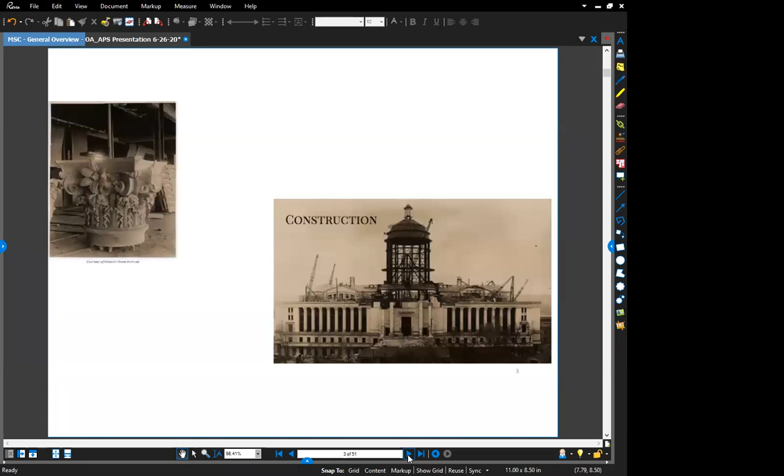Bill? Okay, Mike, thank you very much, and good morning to everyone. Get ready for some pictures that you probably will never be able to see again because of where they were taken. So I'm going to start with a picture of the original construction underway, the last time there was scaffolding on the dome. Also on the right of the picture is the original Ceres statue looking back down towards the north. Keep in mind as much as you can remember what Mike brought to you, because we're going to cover all of that pictorially in the next few minutes.

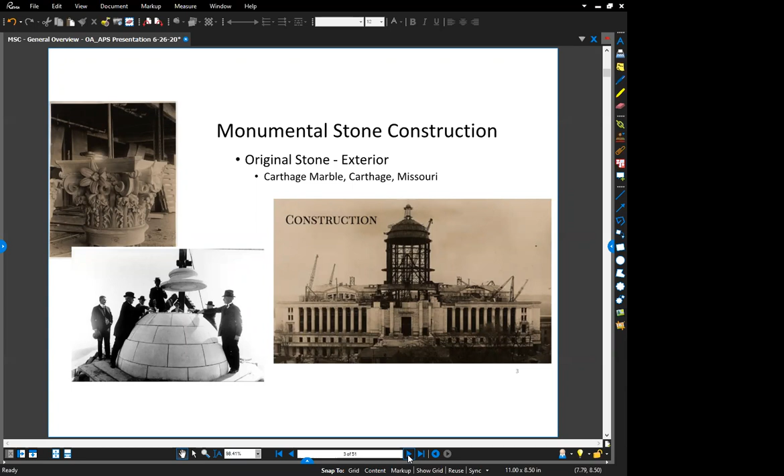As Mike said, the original stone for the Capitol came from Carthage, Missouri. That quarry is no longer operating. The hole in the ground is there, but getting that original stone was not possible. However, the stone that was chosen, and the other two in the final selection from Oklahoma and Batesville, Arkansas, even though they are in different states, are all in the same geologic formation.

One thing to keep in mind when we use the word marble is that we think of marble as something on our countertops at home, very hard, very dense. The Carthage marble is actually a limestone, and limestone is a porous stone, and therein lie some of the issues with using limestone on any building: because it is porous, it does absorb water. Natural cracks in the stone, from the way it was formed millions of years ago, can cause problems, and all those problems manifested themselves in the Missouri State Capitol and were drivers of the renovation. Mike mentioned some severe deterioration and problems.

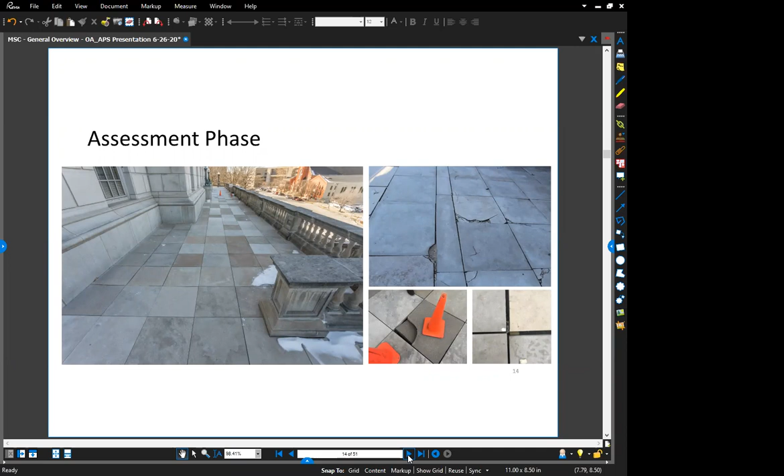Drones were used for assessment to look at places that were inaccessible without scaffolding. There's a lot of drone usage, flights, pictures taken. Here's some pictures of the plaza terrace pavers as they existed before. You'll see a number of different colors. That is because there is a variety of other stones in the Capitol. It was built not only with the Carthage marble, but there is Indiana limestone, Alabama limestone. There's kind of a mix of stones on our Missouri State Capitol, or I would say there is still some remaining, and I'll cover that later. There's pictures of some of the deteriorated pavers.

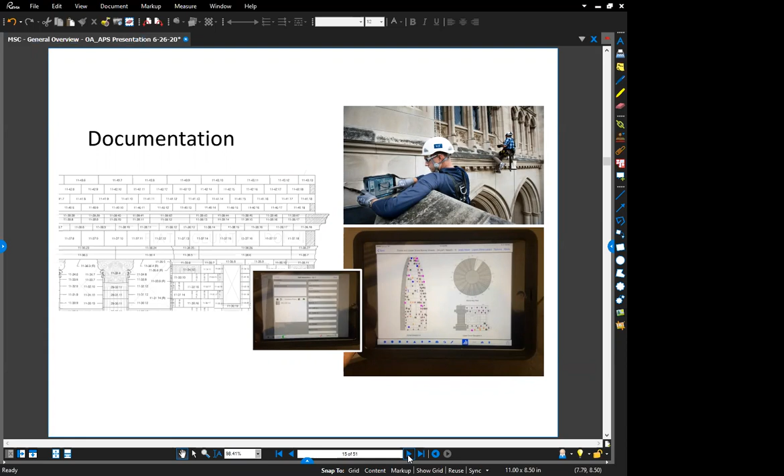After the assessment, then it came time to document it. So there you see one of the workers from the stone consultant taking pictures of some of the damage. You see just one picture; there's hundreds of pages marking every stone on the Capitol and its condition, which was later used to determine the scope of the work for the project.

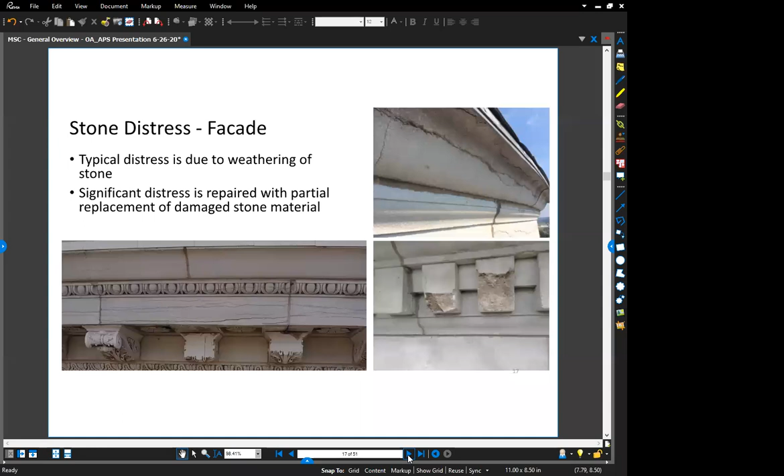And the distress that Mike mentioned, due to the weathering of the stone, there's some classic examples of the horizontal planes of the rock beginning to separate, the stone beginning to separate, which it does naturally. You see a picture of some stone features there that literally have fallen off, and there's no place to go but down with that. And so that falls down on the plaza, on the terrace.

So then, now that everything's been documented, what do you do? Mike mentioned the goal was not to put a new look on the Capitol, but to restore it in a manner that it was the same as the original Capitol, to maintain its historic value. So the first priority, of course, was life safety. Where were there portions of the Capitol that were literally falling down that could become a hazard to people below, and letting water into the building and causing further damage?

Priority number 2 was serviceability, and that was basically repairing stone that could continue to deteriorate in the coming years, since the Capitol is going to be around a long time. And the final priority was aesthetics. While important, the first 2 were the ones that needed to be addressed first, and then aesthetics was third priority.

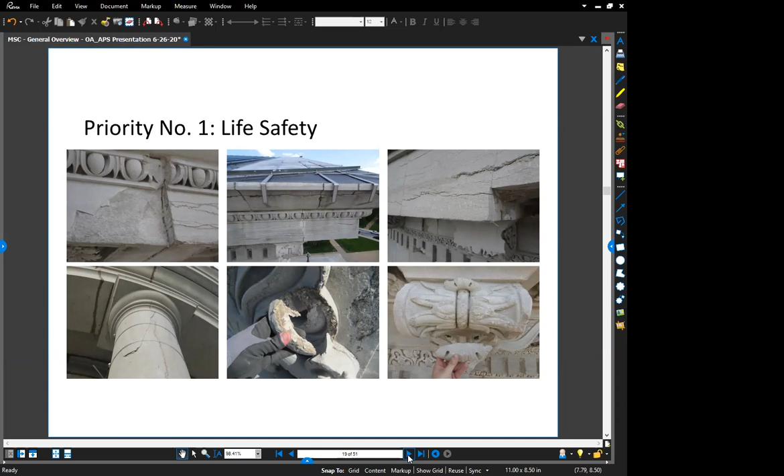Life safety. So when you look at some of these pictures, you see the damage. You see stone in places that are not good, where the stone could fall down upon people beneath and allow water infiltration into the Capitol. And there's just some examples. On the left there is one of the stone columns, and a huge piece that would come down like a big knife.

Serviceability, issues allowing water in. Top left there's a joint in the stone where it has been mortared previously and has continued to separate. Water can enter the Capitol. All these cracks that you see allow water to enter in the Capitol and into the stone, and do a

couple of things. They cause further deterioration of the stone, particularly in the freeze-thaw periods of the winter, where the water expands and increases the damage. And then, of course, water can find its way into the Capitol, which causes interior damage.

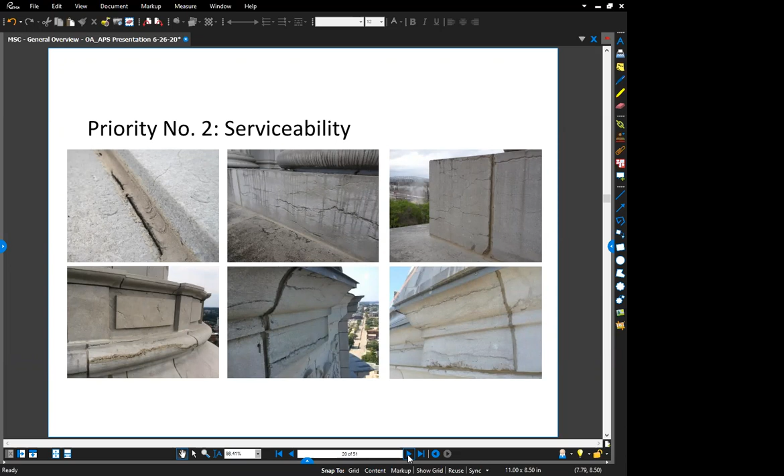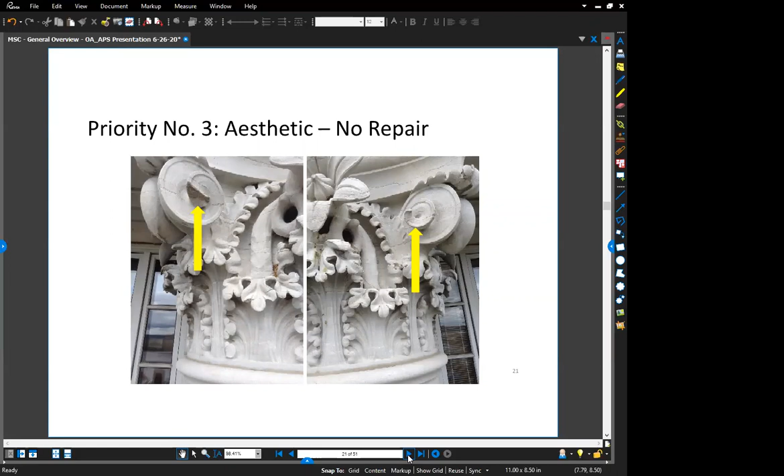The project was able to address almost all of the aesthetic issues, but again, when you have something very small at the top of the Capitol in a place that was very expensive to replace, and it's not causing any other issues, it may not have been addressed necessarily. There's some more aesthetics. Again, things you may or may not have noticed in the Capitol previously. These have all been addressed.

So then, once that was done, we went into the construction phase. There was a bidding period, and the contractor was chosen, Billy and Andrews Masonry and Restoration, affectionately known as BAMR. This is their only business, restoration of historic structures all over the country.

Soon after the contractor was chosen, one of the first major tasks they had was to put together what's called mock-ups for the final selection of which stone to use. These were done on the north side of the Capitol. They were done sort of in secrecy so that there was no bias in the choice. They were not all in one place, and the mock-ups were done to all the different types of features of the Capitol, from the facade to the pavers to the rosettes, so that those choosing, the Capitol Commission, would see the different stones in all their different settings and uses on the Capitol.

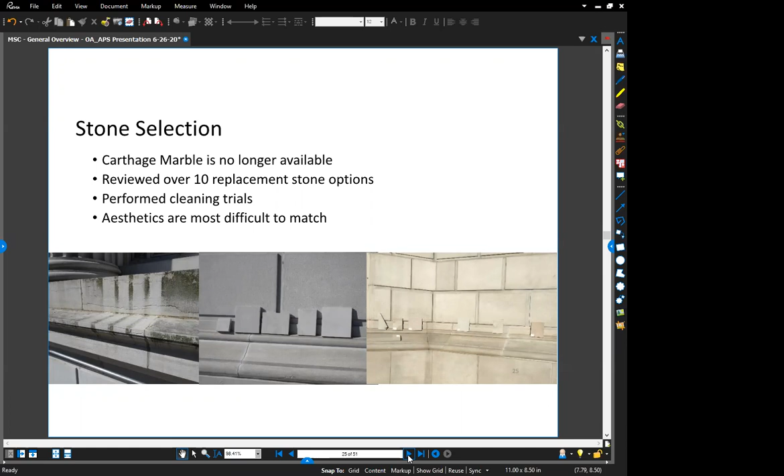There were over 10 replacement stone options, meaning styles and types of stone. Cleaning trials were part of that, cleaning of the stone to see what the different stones looked like. We knew that the aesthetics would be difficult to match, but this seemed to be the best way to make this determination. So then one May morning, the Capitol Commission met and the decision was made.

So once the mock-ups were complete, the Capitol Commission was gathered one rainy May morning and went out to the north side of the Capitol. They were shown all the different stones and features, and asked to make a decision by vote, and they did not know which was Arkansas stone, which was Oklahoma stone, which was Missouri stone. The choice was made of the Missouri Phenix stone, which pleased our then Lieutenant Governor and now Governor Mike Parson, and everyone, that the Missouri stone, although it's the same geologic formation, was chosen.

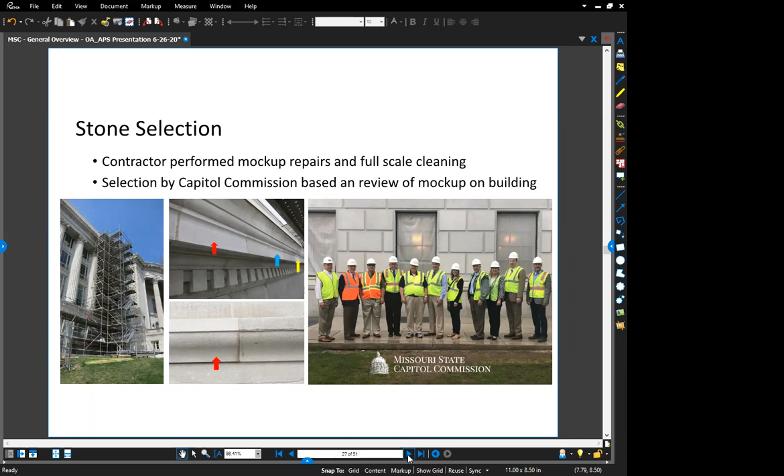So from this, we knew what stone was going to be utilized, and the task was then to get started on the construction. Here's a picture of the current Phenix marble quarry north of Springfield, and you'll see these nice sharp faces, almost like the finished stone. Unlike a lot of quarries, where you may blast stone out or drill it and split it, this is actually cut by a large saw.

And if you look in the large picture, you see those circular bands. That's actually how they cut the blocks of stone out. So what you're seeing there are actual stone blocks that came out of the quarry that then get cut again and again and fabricated into the different features of the Capitol, from the rosettes to the pavers.

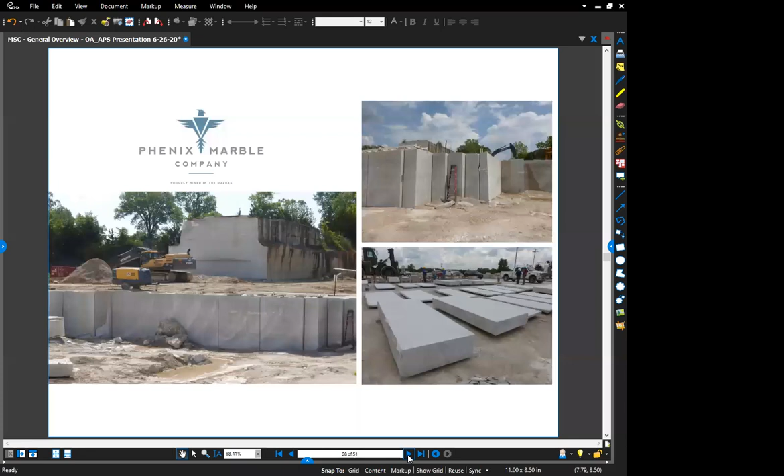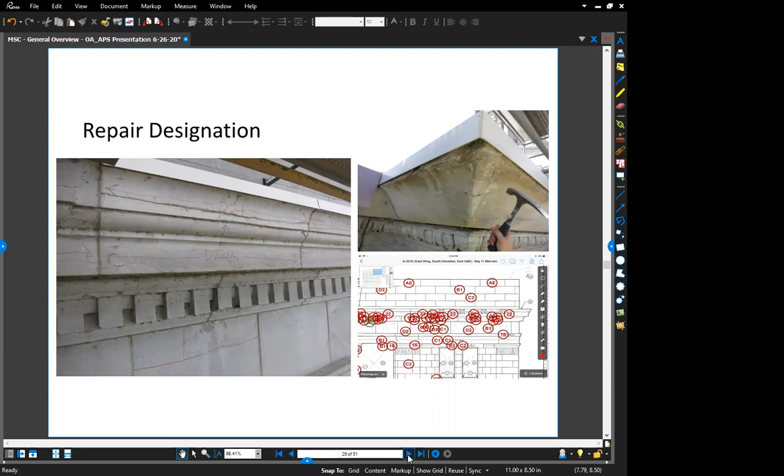Back to some of the documentation here. You see some markings on the stone, and those will correlate with the hundreds and hundreds of pages of documentation about the damage around the Capitol. This provided identification for the contractor to know which stones needed what type of attention. And this is a very complex system, but it worked very well.

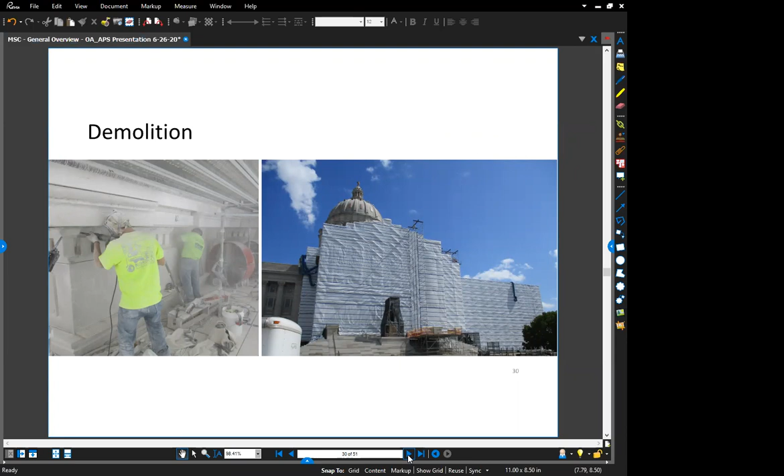The demolition then began. So the stone consultant visits the site quite often, and every time they came down, they stayed ahead of the contractor by designating which stones were to be replaced, which stones were repaired in place, and any other repairs that needed to be done. And with that, the workers began removal of stone that needed to come out and be totally replaced.

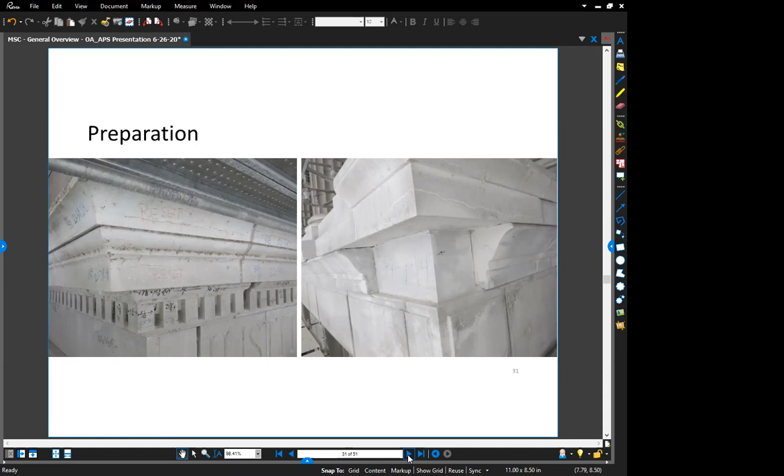So in this picture here, you see the markings on different pieces of stone. You see notations there of reset, which means that stone was taken out and reset because for some reason or another it was not structurally in good shape as far as its attachment to the building.

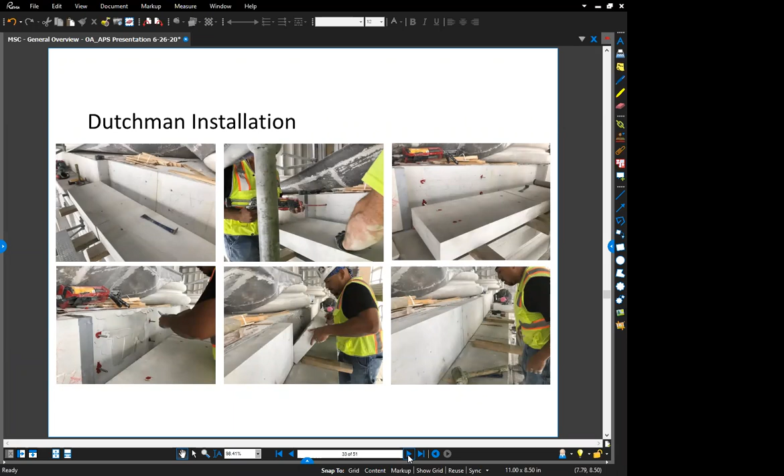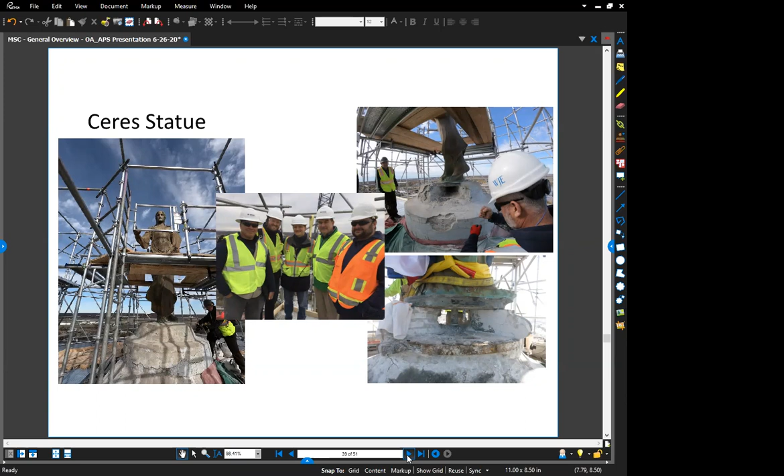So Ceres was removed. One of the largest cranes that's made, a 450 to 500 ton crane, was used to remove Ceres. 250 feet plus another 10, 11 feet to the top of Ceres and sit back at a distance. Although Ceres only weighs 1,000, 1,100 pounds, when you reach out that far, it takes a lot of pull. Try lifting up 15 pounds with your arms outstretched, and you know what I'm talking about.

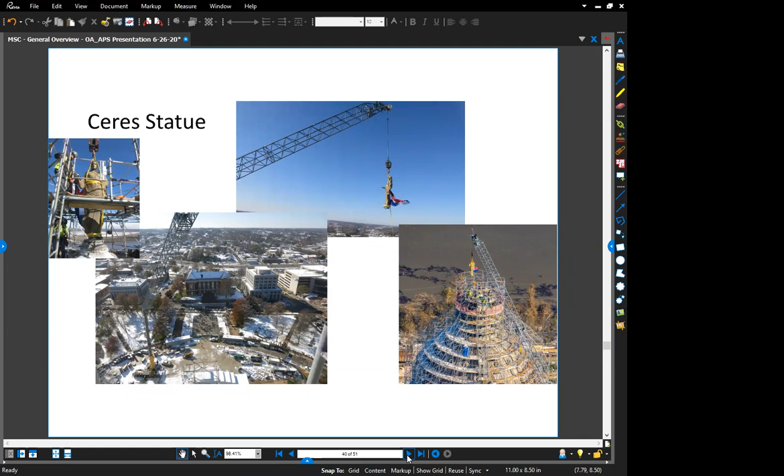There's a picture of Ceres being removed initially to go to the conservator for restoration. There's Ceres on the ground as she came off, and then some pictures of when it was initially removed of the viewing before she was whisked off to Chicago to the conservator's studio.

Ceres is not a lightning rod. Well, it is a lightning rod, but it's not the lightning rod for the Capitol. However, it has served that purpose because of the fact that it is bronze and sitting at the highest point of the Capitol. And there's a picture, that would be hard to take right now because the scaffold's gone, of Ceres at the top of the Capitol, back in place, just before the scaffold supporting things was removed.

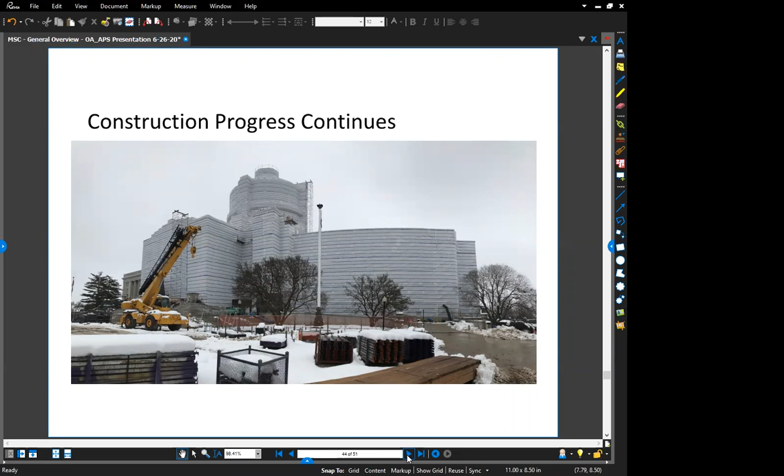So construction continues. Originally it was set to be about a 30-month project. Things are moving along right where they need to be towards their completion. We've had an occasional obstacle. This one, you will remember from back in

2019 when a little tornado skipped through Jefferson City. Thankfully, that went east of the Capitol. The damage that was sustained by the project was very thankfully limited to a lot of the wrap on the side of the scaffold that was torn off just because of the winds. But we were very fortunate compared to other parts of Jefferson City when that tornado hit.

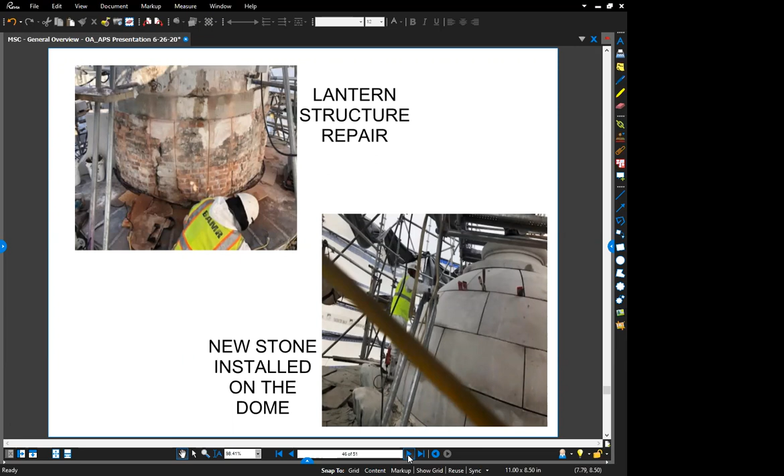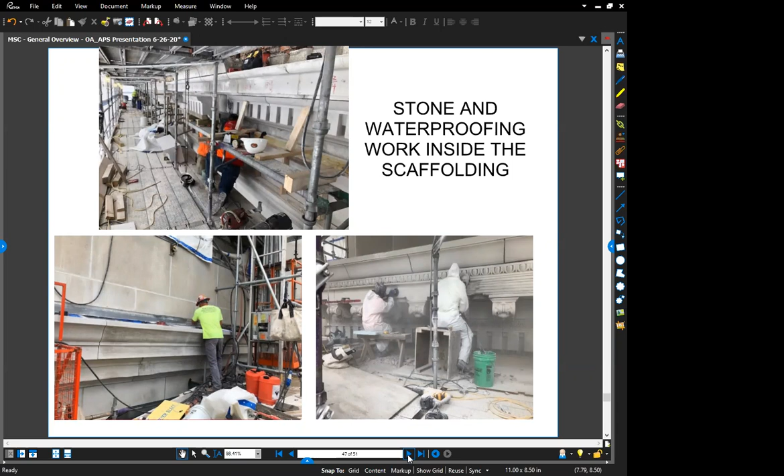There's also a fall protection system that has been added, one up at the lantern, one down at the base of the columns, and that is to allow safe access to work on the new lighting system that was put in at the base of the columns. There were lights there, however, they were generally not working very well, and it was very tough to get to them to work on them. Now a safety tie-off system and access door have been put in for Capitol maintenance to get to that.

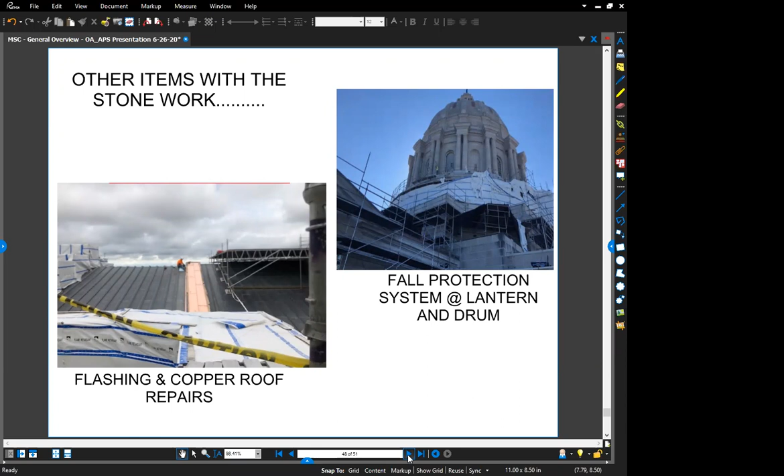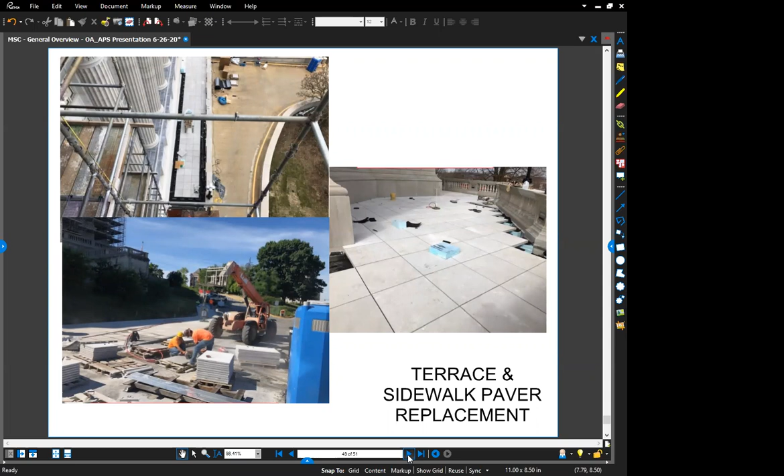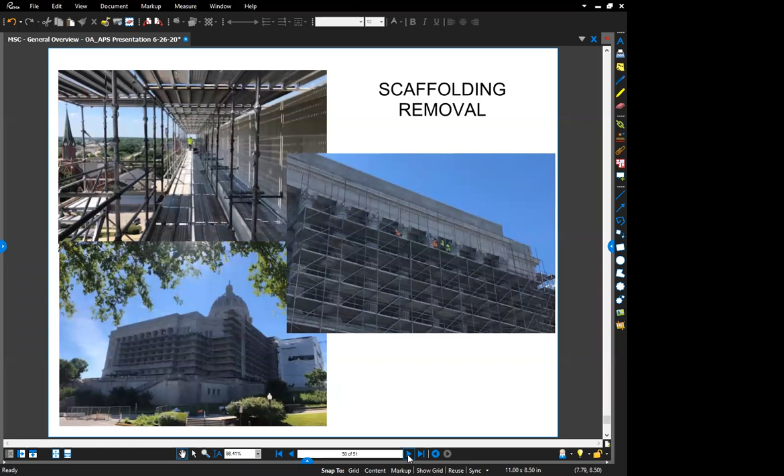And what's going on right now? That scaffold is coming down. So again, these are very current pictures. Upper left is near the top of the scaffold as it's coming down. There's as it sits 3 days ago, and there's the workers dismantling the scaffold as they come around the southwest corner towards the south portico. Scheduled completion is November of 2020. The contractor is on schedule for this restoration of our state capitol.

Gentlemen, thank you so much. What an interesting presentation. It's really amazing to me that all this work was going on behind that covering and all the scaffolding, and we were just unaware of it here in Jefferson City. Really appreciate your insight into this. I don't see any specific questions for our speakers on the chat. So I will just one more time thank you all.

One question I had is, this is considered to be phase 2 of the Capitol renovation project. Is there a phase 3 planned? I guess that question would be for Michael or Mark Hill or somebody on the line. I think they're muted right now, Randy. Oh, okay, I'm sorry. There they go. Yeah, I'll take this one, Randy. This is Mike, and I was hoping Mark would take that, but I don't know if he's listening or not.